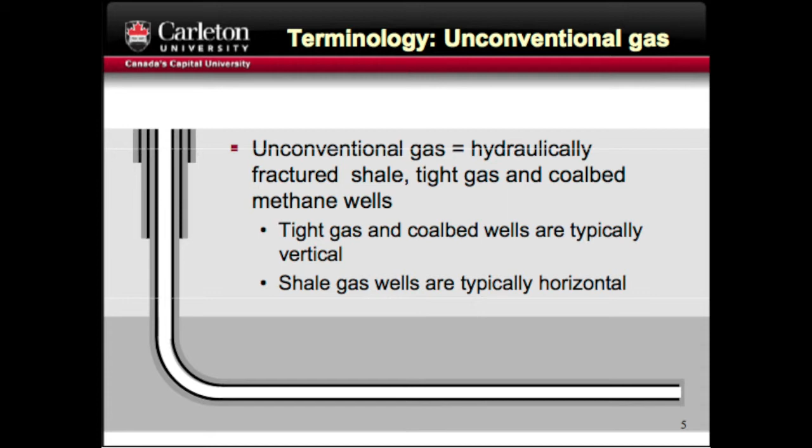So, terminology. First thing you hit is that unconventional gas means a lot of different things to a lot of different people. In fact, I was reading last night, in the 3 hours waiting for the plane to take off, EPA has just recently decided they're going to drop the term because it just doesn't mean anything anymore. They're going to talk about hydraulic fracturing exclusively, be it for shale, tight gas, or coal bed methane. Tight gas and coal bed wells are typically vertical, and shale gas wells are typically horizontal, so maybe that's a useful distinction.

API and the America's Natural Gas Alliance have just, in response to some EPA emission factors, published survey results that are quite enlightening on a number of fronts. They're criticized on a number of fronts, but there's a lot of very useful information there. For example, surveying the industry for 2010 and the first half of 2011, number of completions categorized as conventional, shale, tight, and coal bed. You can see that 84% of shale gas are horizontal wells with hydrofracturing, so that supports the generic description. But when you wade through the literature, different people mix these things up different ways, and it's really quite confusing.

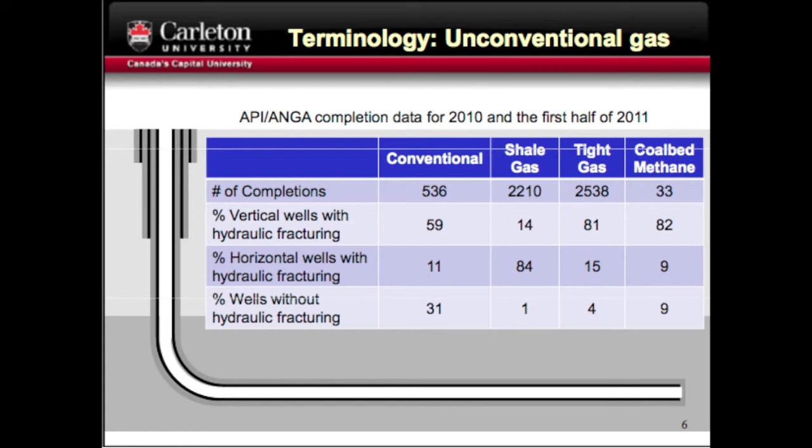Things you probably know: estimated marketable Canadian resources are in the trillions and trillions of cubic feet. Horn River Basin in BC is already a big player, and Montney gas plays. Significant coal bed methane in Alberta, but there are significant potential shale resources in other parts of the country. Other parts of Alberta, Quebec is sitting on a lot of potential resource, New Brunswick, and I'm not sure they've fully explored east of that.

Shale gas by 2035: production increasing to 4 billion cubic feet per day, 22% of total natural gas production. This is using how the National Energy Board defines shale gas and tight gas, but tight gas then makes 49%, so together that's 3/4. And so really the title is correct. Unconventional gas, if you include all of these things, is the new norm moving forward.

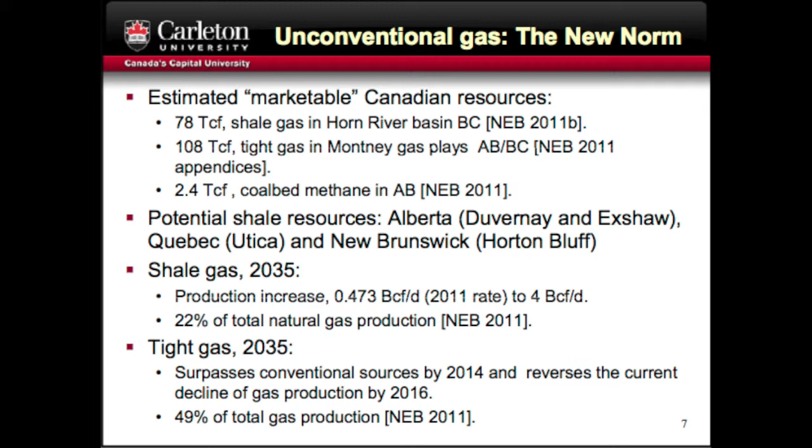So this is where things are going in gas. So let me do my version of Shale Gas 101 on how this process works. I think we're just talking about this as I talk very briefly about where the emission sources might be coming from and the challenges we're going to face. So, as with any process, you have a drilling and casing insertion step, and that's the iterative step. You drill, insert some casing, and away you go.

But once you've got your well drilled, first thing you're going to perforate the casing section. Then you're going to do hydraulic fracturing, and so that's to free up formations. You're going to have some kind of flowback period where you're bringing that fracking fluid out, whatever fluids come up from formation. But there's also gas that is released during the flowback. So that's one of the key processes that's very difficult to get a handle on and swings the different studies a lot of different ways.

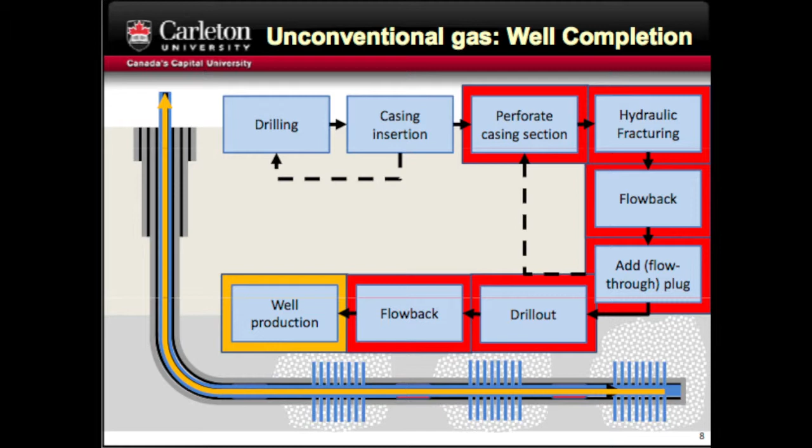Depending on what you're doing, you're going to do a multi-stage frac, put a flow plug in of some kind, do the casing perforation again, frac that section, and do that a few times. Now you've got these flow plugs in, and there's different types of flow plugs. The type of flow plug you use also affects the emission rates, whether or not they're cemented off or if they have flow-through valves. There's some drill-out step. There's another flowback stage, and then finally you're into production. It's pretty nice and simple. Even as complex as that is, it's nice and simple when it's a cartoon. The reality, of course, is probably nothing like the cartoon.

And so if you're going to try to get a handle on the emissions, this is, again, a very simplified block diagram of the things you might want to consider. During the drilling and casing insertion, there's some amount of venting that may or may not be flared. Perforation, hydraulic fracturing, the flowback is another significant section. Drill out and then flowback again. There are important steps anyway. The numbers may or may not be significant, but there are important steps to consider correctly if you're going to get a useful, applicable emission. And at that point, you've completed your well and you go into production.

And then depending on your study and what you're doing, you then may or may not want to consider emissions downstream from that as you go through the pipeline distribution network and compressors and whatnot. You may go all the way to the end and say, what do you use the gas for? And do you generate electricity? And do you do it on a gigawatt of electricity basis or a thermal basis?

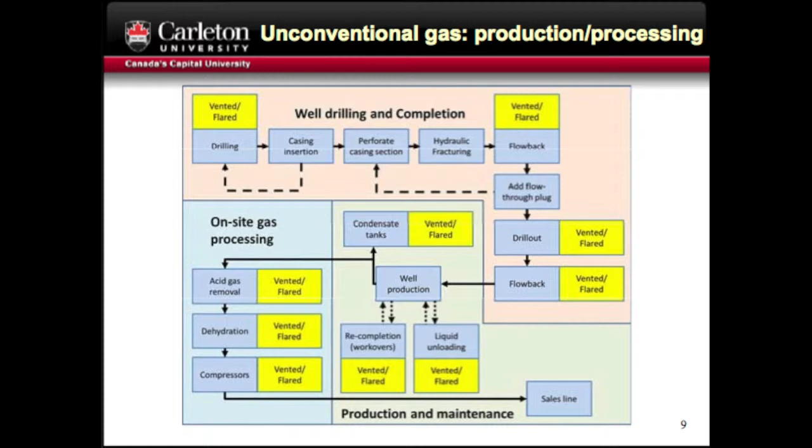And the reason for dragging you through this is if you're going to try to make sense of the literature, you kind of have to have some appreciation that all these steps were either directly considered or indirectly considered by being neglected in the various studies that are out there. And once you start looking a little more physically into what's going on, you start to appreciate why there are these vastly different numbers and why maybe you don't need to put a whole lot of stock in any of them at the moment. So, emissions from unconventional gas, I think it's fair to say there's a critical lack of comprehensive sources of emission data for unconventional gas production. That's not a surprise, I don't think, to anybody.

There's much debate over the quality, objectivity, representativeness, I'm not sure if that's even a word, but if you know what I mean, completeness and accuracy of available sources. And a lot of those complaints, or those big long adjectives, go to data that's collected by the EPA. Most current studies in some way point back to data derived by the US EPA through the STAR program workshops. And I'll show you another slide in a minute.

More recently, there's this survey data, operational survey data from API ANGA that has the potential to significantly change how we interpret that EPA data, I think mostly for the better. But directly relevant, openly derived data from Canadian basins is lacking. I think that's one of the reasons for this RFP, to try to see if we can look into that a little better.

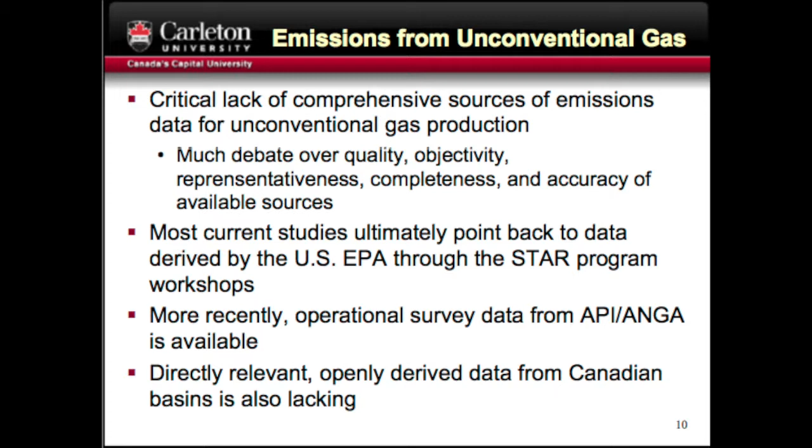So I guess I could reorder this a little bit, but I'm operating under the premise that most people have heard of unconventional gas, and most people have heard of various studies that go from this really is a great, wonderful, clean energy source for the future, to this is worse than coal, and numbers in the middle.

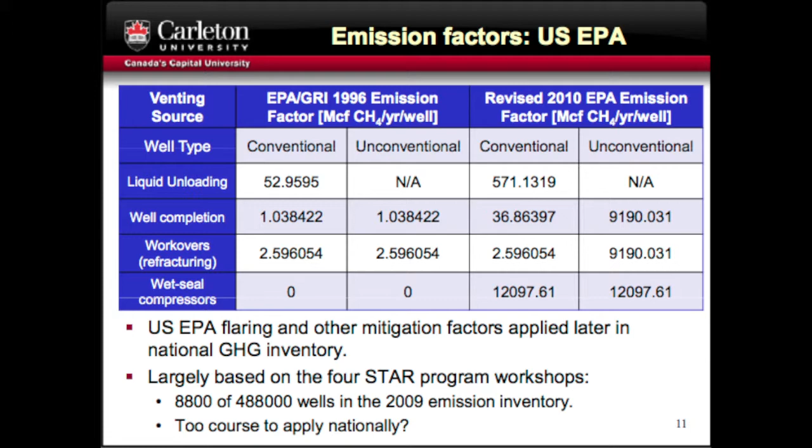And really in direct response to that, API, ANGA, one of the first things they did... this is all happening very fast. This is another challenge doing this as a lit review. There are literally new studies every week. And since we've started, there have been significant developments and things that we've added to the list. We're at over 100 sources so far, and it's not closing yet, which is a little frightening.

It's a good thing we work at a university, so we don't have to make money doing this stuff. It's just for interest, and it's a great problem.

So in response to the EPA emission factors, API, ANGA did a really quite impressively comprehensive survey. Now there are some criticisms of how they designed that survey. I think it's fair to just acknowledge that there are criticisms, so I'm not saying that these are the answers, but at the end of the day, there's better data here than there is available in a lot of other sources.

The survey was based on 91,000 wells, approximately 26% of the US EPA well inventory, and covered 19 of the 21 American Association of Petroleum Geologists basins. EPA data is derived from 8,800 wells, not small, but a different order of magnitude. And what they were trying to get at was liquid unloading, well completion, and well recompletion rates, because these are so important in that block diagram I was showing you for driving the emissions.

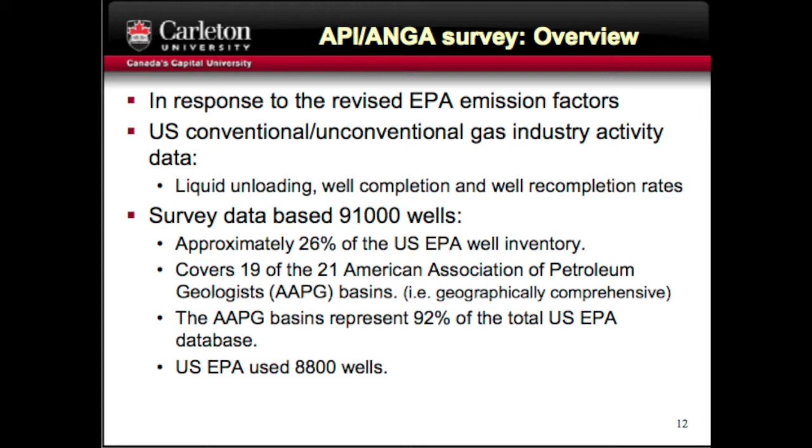I showed you the EPA numbers. Really, this isn't supposed to be a talk about numbers. I just want to contrast that with things that are in the API ANGA survey results. They found things like 45% of unconventional wells surveyed had plunger lifts. Put a plunger lift in, that significantly reduces the emissions you get during liquid unloading. That wasn't considered in the EPA numbers. So there's good reasons for large differences here.

Still 11%, 16% of unconventional wells they found were directly venting, this API data. Their emission factor is a number like 175 thousand standard cubic feet methane per well. If you took their data with the EPA assumptions, that would have been 1,300. And so API's contention, which I think on balance of probability is probably the most correct, is that 1,300 really should be more like 175. Probably there's an answer in between, but that's an example of things that really swing the numbers a lot.

Well completion data, unfortunately, the API ANGA data was insufficient, or they deemed it insufficient to provide emission factors for flowback. So no matter what, our interpretation of the data review so far is that still we don't have reliable sources that are going to get us concrete, definitive answers. So there's definitely shortcomings still.

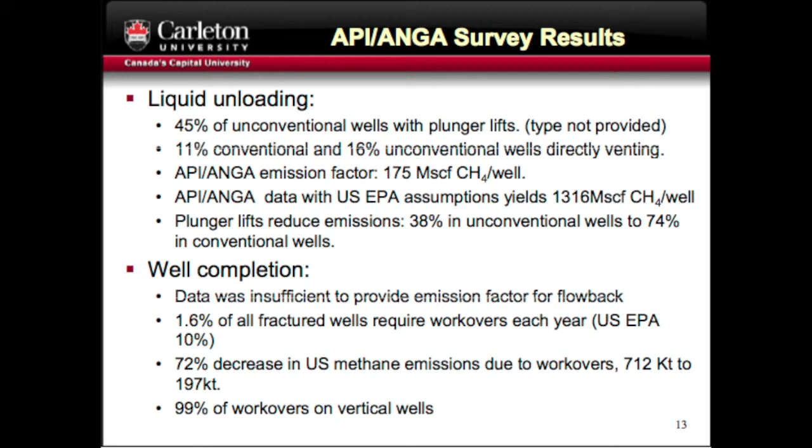1.6% of fractured wells required workovers, EPA at a number like 10%. That really changes things. And their data suggests 72% lower methane emissions due to workovers, et cetera. So there's really two quite different points of view. There are some other sources of data, but those are kind of the main ones.

And I guess really I'm trying to set the stage a bit. With that backdrop, then you start to take a look, just very briefly, at some of the life cycle studies that are out there. So I want to just take a couple minutes to talk about that. The Howarth study at Cornell was the first one and the most quoted one. It says a lot of things, but the thing that gets quoted is the numbers on a 20-year time scale suggest that overall greenhouse gas emissions are worse than coal. A number of other studies since have refuted that.

But when you start to look at the nitty-gritty of these different studies, you find that the definitions of unconventional wells right off the top get mixed. So it gets very hard to compare them at the outset. As I mentioned, EPA has dropped the use of the word unconventional in this year's inventory. Different studies consider different geological areas, and there's ample data to suggest that different geological areas have different behaviors, especially when it comes to things like liquid unloading. And different studies do or do not include that, and that single thing can drive the emissions factors by 2.

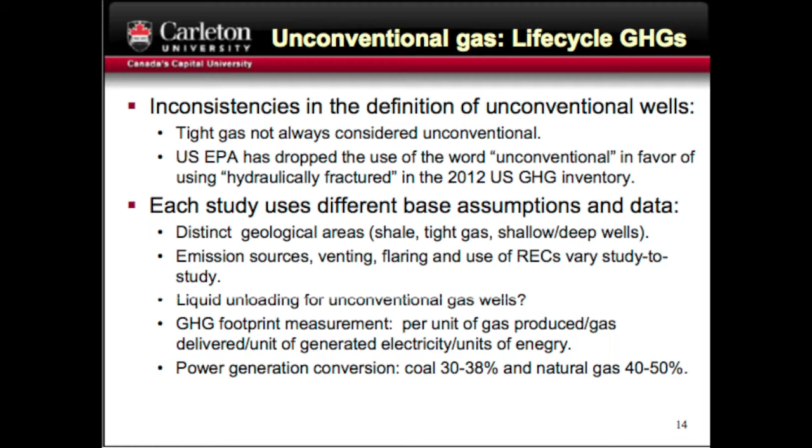GHG footprint measurement, a lot of debate. The Cornell study did it per unit of energy, other studies do it per unit of electricity. You get significant differences when you do that, and part of that's doing the energy conversion. I don't want to dwell on this, but this just compares several of the main ones. So Cornell, NETL, which a lot of people saw as a direct rebuttal of the Cornell study, Carnegie Mellon, S&T Consultants, NRCan, Deutsche Bank, and the Tyndall Centre. Those are some of the main ones quoted.

Other things that swing the numbers depend on what time scale you consider, 20-year, 100-year. Cornell used numbers from Shindell in Science that are more recent than the IPCC, is their argument. Others would counter and say that those aren't internationally recognized at this stage. I'm pointing that out as a difference. Other studies have used Kyoto numbers of 21 that most people would say are quite out of date. Did you do it per chemical energy or unit of electricity?

And big numbers. This study, I believe, tried to do Monte Carlo analysis. So they basically said, look, all these things are really uncertain. We really don't know a lot of these emission factors. And they said, well, plus or minus 40%. It could be 40% better, or it could be 40% worse. And if there's a takeaway from here, personally, at this stage, I don't want to prejudge, but I'm not putting a lot of stock in any of these numbers myself.

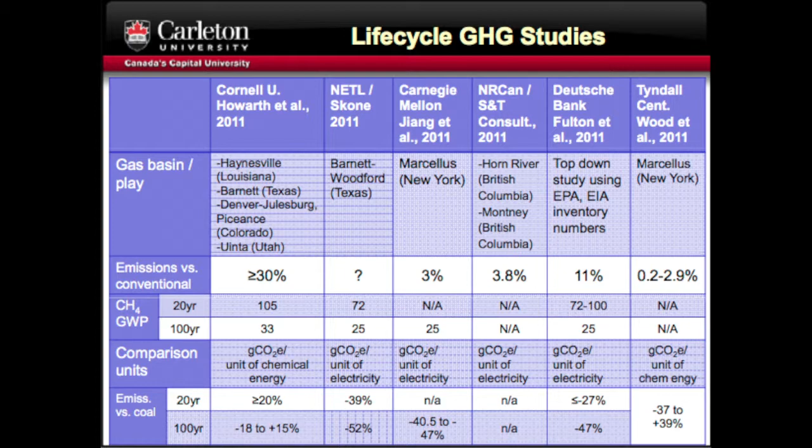This is the one, if I want to pick one to believe, I'll probably pick that one at this stage, and that, I don't know what it is, it's plus or minus 40%. It's really difficult to sort these things out, and that is what we've foolishly agreed to try to look into. So, getting answers. How are we going to get through this?

Yeah, thanks, Randy. Rescue me.

There's a clear need for objective technical analysis, and that's the motivation for the RFP. And I think PTAC and CAPP deserve credit again for bringing these forward. Data availability is a critical challenge. I mean, some of this data isn't there. There is a study I'm aware of, a collaboration between industry and the Environmental Defense Fund in the US, that is currently attempting to measure emissions during well completion events, but it's completely locked down in confidentiality. That data may appear, to my understanding, in the new year. So that's likely to change things again.

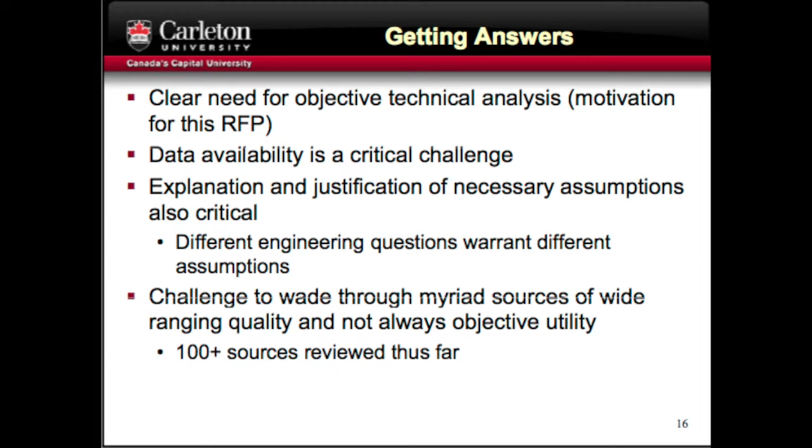Another thing to keep in mind is different engineering questions warrant different assumptions. So try to avoid directly criticizing any one study, because it depends on what you're asking, what sort of frameworks you might want to look into. The challenge is to wade through the myriad sources. So if we are to do this, or someone wants to do this, this is really the kind of thing I want to bring forward, and then I'll end with these six points. If you're really trying to get accurate, defensible, peer-reviewable data, by our estimation at this stage, these are the sorts of things you need.

First is you need geographically diverse data. Different plays have quite different characteristics, and that really matters. And that's generally quite overlooked in the life cycle studies that are out there. Range of operating practices, just examples: CO2 content can swing things a fair bit when you start looking at the methane emission factors, and there are examples from basins in Canada that vary a fair bit, 1 to 12%. If you're trying to get at combustion emissions, you really need to understand all the combustion emission sources, and they can be significant. There's a lot of energy involved in this. So you need access to data that's not always easily attainable.

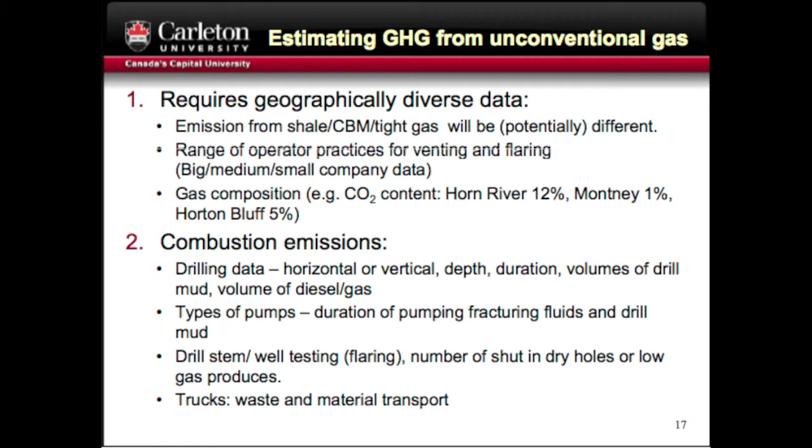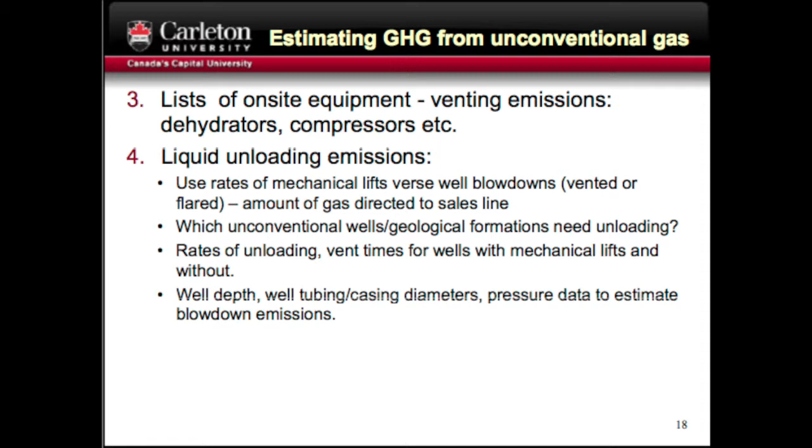And so when some of these life cycle studies start to diverge, a lot of it comes down to how they dealt with these necessary assumptions. Maybe they made good ones, maybe they didn't, but it's difficult. On-site equipment, venting emissions, dehydrators, how you handle that. Liquid unloading emissions are a really key one that have been overlooked in a number of studies. What are the use rates of mechanical lifts, well blowdowns, which formations need unloading, etc. Well completion emissions: number of completed wells per pad, fracturing stages, how often you are using reduced emission completions, or so-called green completions.

Well servicing and workover rates are very important. They can really swing the numbers. And one of the most sensitive, but unfortunately most critical, is well lifetime data. This typically gets to proprietary things, so people don't want to release their estimated ultimate recoveries. But it's been shown in an interesting paper by Hughes, the last thought I'll leave you, just how difficult this can be if you don't have good data going in. The results at Cornell that are so out there on one end, and the results of the NETL survey that are somewhat on the other end, can be brought together by changing just the estimated ultimate recovery.

And so I guess where I leave is, this is a very important challenge. I think probably most people here would agree, but it's quite a daunting one, and moving this forward is going to require quite a bit of work and quite a bit of data collection.